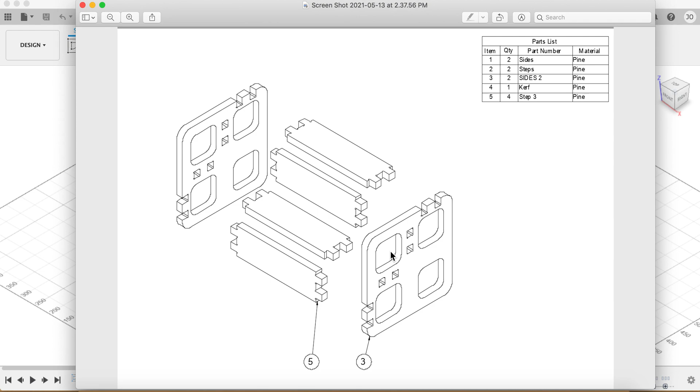So also, by the way, this is about like the sixth take. Fusion keeps shutting down on me and it's not quite working. So anyway, here we go. Let me try again. Okay.

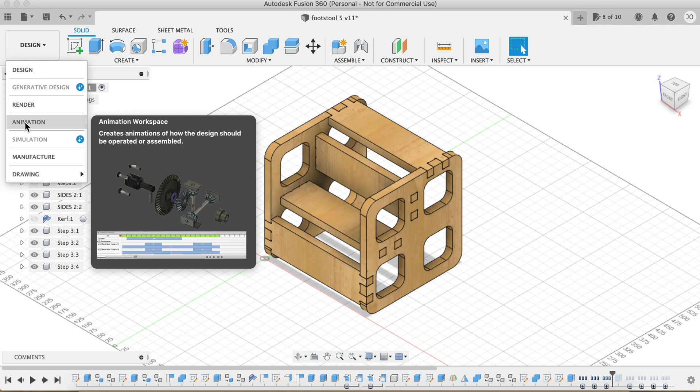Flip this one back on. So we finished our project. Everything is the right dimensions. Everything's all set up. Looks good. Components are there. Components are clear. So what I'm going to do is I'm going to go to this design, and then I'm going to head down to animation. Okay. So actually, I already started it. I already did it before, but I'm going to show you again how to do it.

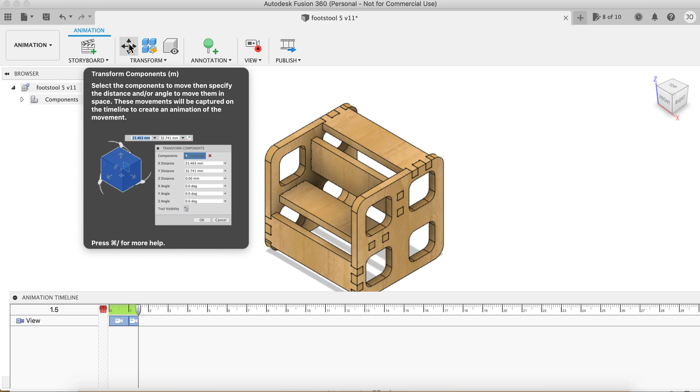So here I can rotate this around. I can move it, but basically, this allows you to kind of animate your moving parts and things. What I'm going to use, there's only really one command. It's this right here, transform components. So here it's important that you have components. I'll click on the component and see these arrows pop up. Then I'm just going to move it like that.

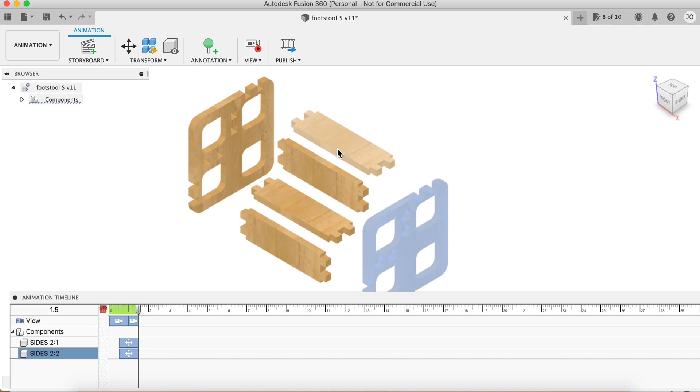Say OK. I'm going to click on the other component that I want to move. Use those arrows. Say OK. And I can keep going. I could do this one, and see I can move it up. I could rotate it. I could move it back down. Whatever you want to do, you can keep doing that. It's going to be a little bit different for everybody's work, but that's the idea. You get it exploded so it looks something like this.

Okay. Once you're finished, then you can go down. I actually already renamed it, but originally it would say storyboard. So I can click down here where it says exploded view, and I'm going to change it. You can double click it and say explode. Like I said, originally it probably said storyboard. You can actually add more of these, but this is where you just need to add that.

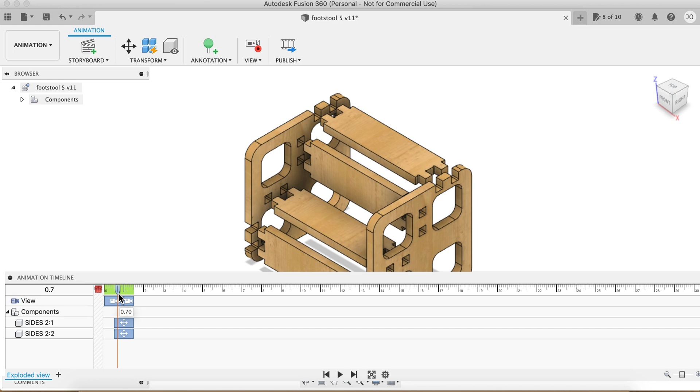And check this out too. If I toggle this little switch, it's kind of cool. I can see it explodes and it gets big. So it's kind of a cool little feature. Okay. So I've finished with this. I've got my view. I've labeled it. I moved everything around. Then I want to make sure that I save. So say OK. Save this version.

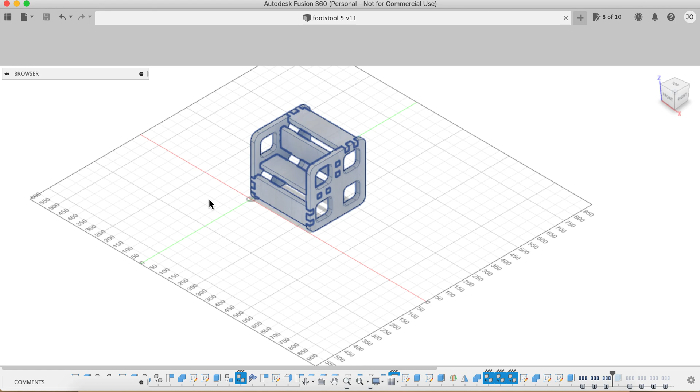Then, much like any of the other drawings, I'm going to head up here to animation, go to design, drawing, from design. Make sure that all my objects are selected. Say OK. And then this is going to create a new tab and create a new drawing for me. So it takes a little bit to load, but it should work fine. Okay, so I've got a new drawing. See, it's created a new tab.

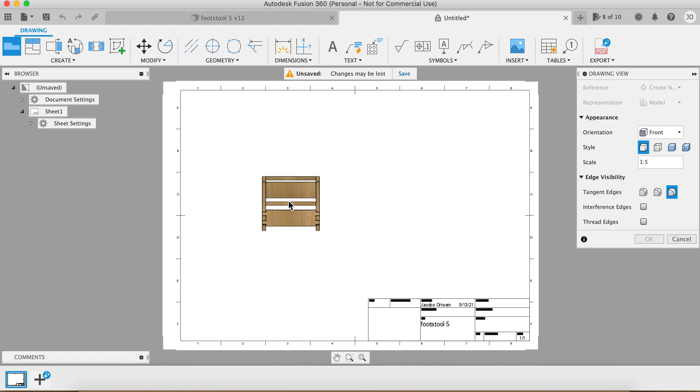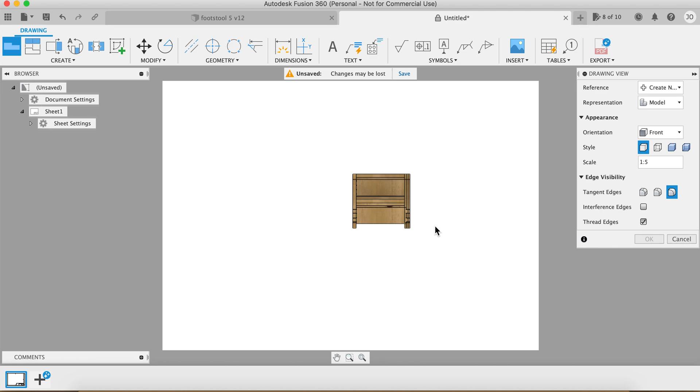Now, the thing is, I actually don't want this view. I want a different base view, so I don't want to put this in yet. I want to do cancel. And to clean it up, I can select these, click delete. All right, so I'm going to head up here to base view, and in this base view, where it says representation, rather than saying model, I'm going to change it to exploded view. Now here's my exploded view.

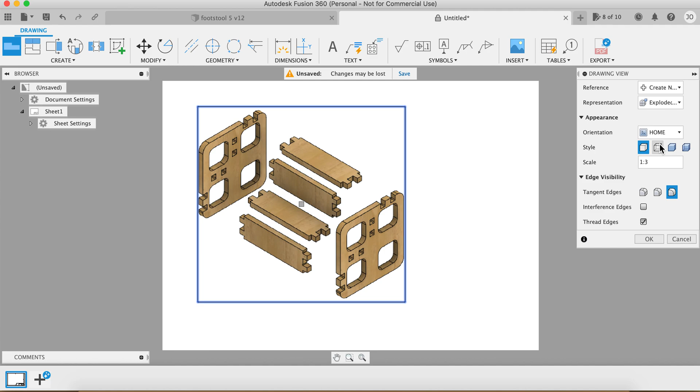I can also go in there. I want it to be a little bit bigger, so I can make it 1 to 3. So here, see, that's my new view. And remember, you can always change these shaded or hidden edges later, but here's my view. I don't like these little dotted lines behind it, so I'm going to change it to visible so it looks just like that.

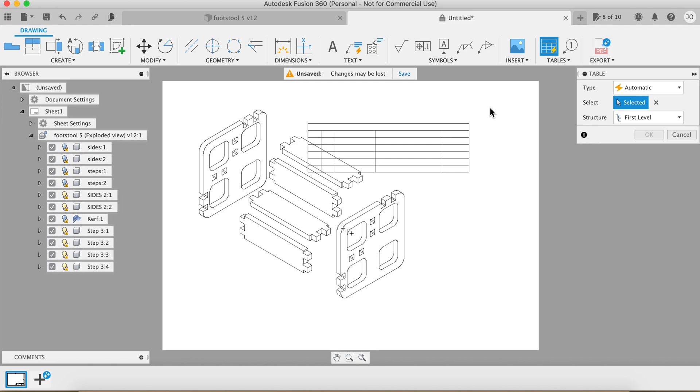Okay. Next, you can add dimensions in this too if you want, but also I can add that table. We've done this before. This is automatic, but I'm going to click on here. I'll just put it up here in the top right. Double click. I don't want this description. I can change it. You can do lots of different things with that, but see, there's quantities for those parts, and it's already labeling which part is which.

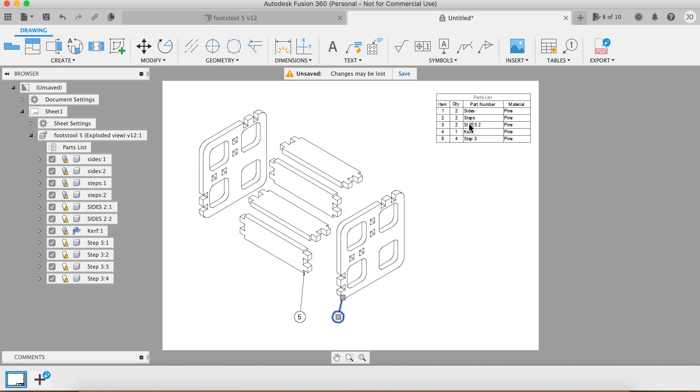So number 3 is the side, and number 5 is the steps. The kerf, all these other things aren't put in, but basically I've got 4 parts. Basically I have 2 things, but they're the same kind of shape. So that's it. Then once you're done, save this. You could give it a drawing name, or I'm going to call it exploded. Save it so that you have it.

You used to be able to export, but in our version you can't. So what you can actually do is just screenshot, and then that goes into your portfolio.